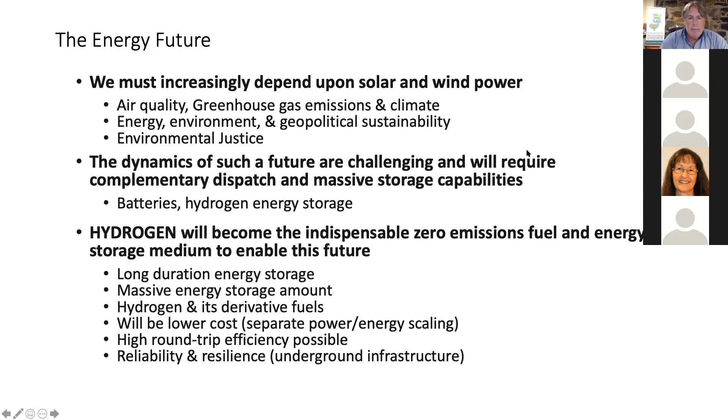Ambitious, targeted, and near-term action is needed to further identify and overcome barriers and to reduce costs. Technologies already available today enable hydrogen to produce, store, move, and use energy in a wide variety of ways. Hydrogen is already widely used in some industries, but has not yet come close to its potential to support the necessary clean energy transition.

Hydrogen can help tackle various critical energy challenges, and it offers ways to decarbonize a range of sectors, including chemical, iron, and steel production, each of which have been proven difficult to otherwise reduce emissions in a meaningful way. For hydrogen to make a significant contribution, it must be sustainably produced at a lower cost, and it also must be adopted in sectors where it is almost completely absent at the moment.

Hydrogen use today is dominated by industry, namely oil refining and the production of steel, ammonia, and other chemicals. Virtually all of this hydrogen is supplied using fossil fuels, so there is significant potential for emission reductions from clean hydrogen. In buildings, hydrogen could be blended into existing natural gas distribution networks with the potential for direct use of hydrogen in boilers or fuel cells.

In power generation, hydrogen has the potential to help with variable output from renewables, whose availability is not always well matched with demand. In fact, hydrogen is becoming one of the leading options for storing energy from renewables and looks promising to be the lowest cost option for storing electricity over long periods of time.

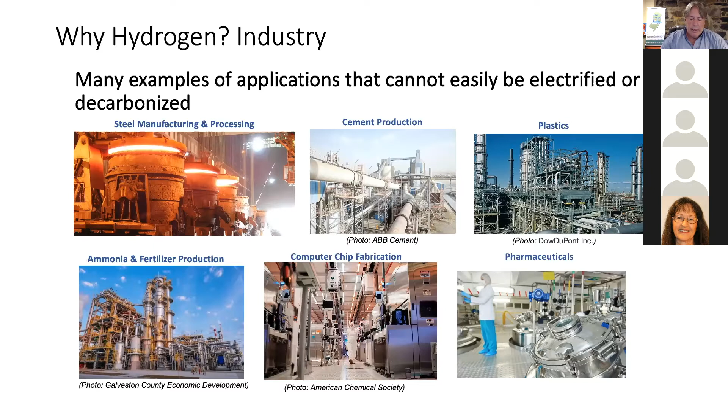Hydrogen and hydrogen-based fuels can transport energy from renewables over long distances, and these fuels can also be used in gas turbines to increase power system flexibility.

In transportation, hydrogen is thought to be a more efficient means of providing fuel for heavy-duty transportation. While I believe that battery electric technology is perfect for the light-duty passenger sector, hydrogen long-haul trucks are quicker to refuel and can easily be refueled at depots. Electric batteries are heavy and take up valuable space that could be used for cargo.

It's noteworthy to mention that several warehouses right here in New Jersey are currently using zero-emission hydrogen forklifts and other cargo handling equipment. I'll also note that shipping and aviation, which obviously are important to New Jersey's economy and environment, have limited low-carbon fuel options available and represent a tremendous opportunity for hydrogen and hydrogen-derived fuels.

The time is right to pull together the stakeholders to tap into hydrogen's potential to play a role in a clean, secure, and affordable energy future.

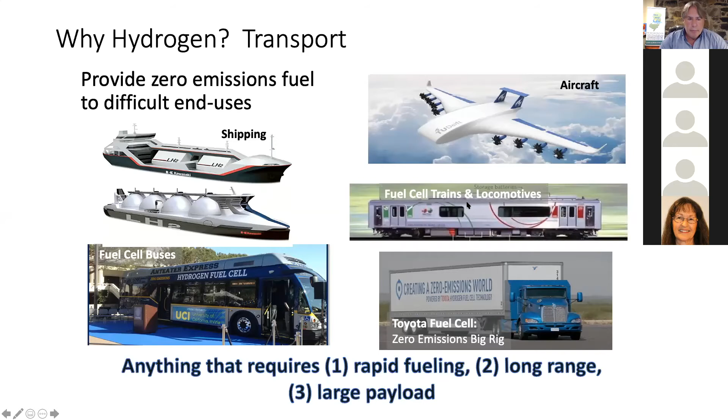There have been false starts for hydrogen in the past. This time, I think it will be different. The recent success of PV, wind, and light-duty battery electric vehicles have shown that policy and technology innovation can be agents of change. These changes seemed far-fetched when I and others started to talk about light-duty battery electric vehicles 12 years or so ago. However, with the increased recognition of the urgency of climate change mitigation, strong interest in green hydrogen as being the next necessary step on the path to net zero is coming from a diverse group of governments and companies, many of whom are represented with us today.

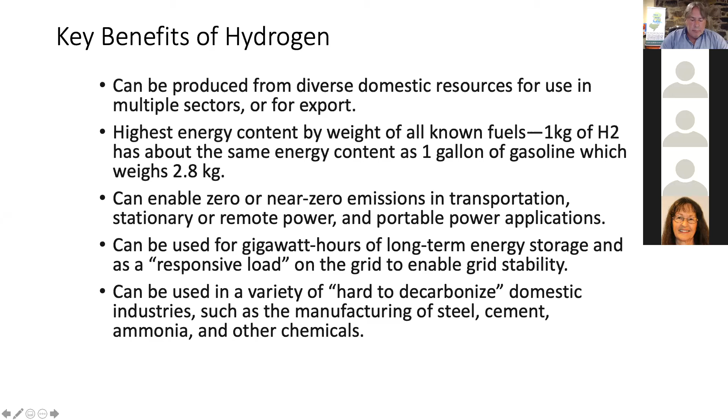Stakeholders include renewable electricity suppliers, industrial gas producers, electric and gas utilities, auto and truck makers, oil and gas companies, engineering firms, and cities and states across the world.

Green hydrogen has been in the news often lately. As you'll hear on our first panel, the Department of Energy is putting hundreds of millions of dollars into research and development of hydrogen-based technologies. And recently announcing a new DOE program to accelerate innovation and spur demand, Secretary Granholm said, clean hydrogen is a game changer. It will help decarbonize high-polluting, heavy-duty, and industrial sectors while delivering good-paying, clean jobs and realizing a net zero economy by 2050.

There is more hydrogen in the universe than any other element, but hydrogen atoms do not exist in nature by themselves. To produce hydrogen, its atoms need to be decoupled from other elements. How this decoupling is done determines hydrogen energy sustainability.

I've already spoken a lot about green hydrogen, but isn't hydrogen a colorless gas? Well, yes, it is a colorless, invisible gas. But as most of you probably know, not all hydrogen is created equal. Keep in mind that hydrogen in itself is a clean fuel. Manufacturing hydrogen fuel, however, is energy intensive.

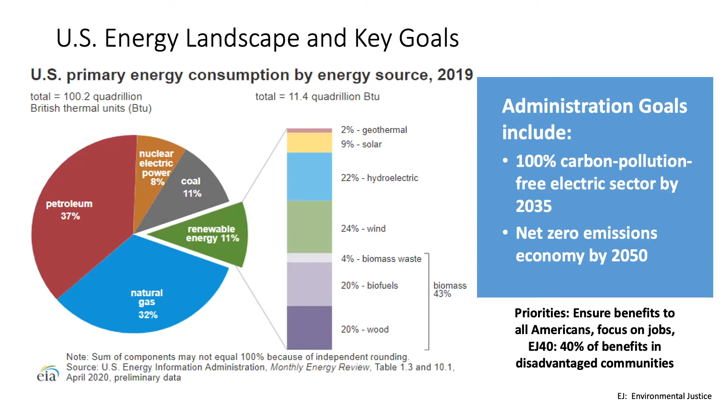But also we're quite interested in metals production, in particular steel. If hydrogen's used for steel making, it dramatically reduces the carbon emissions associated with steel making. So that could be an opportunity as well.

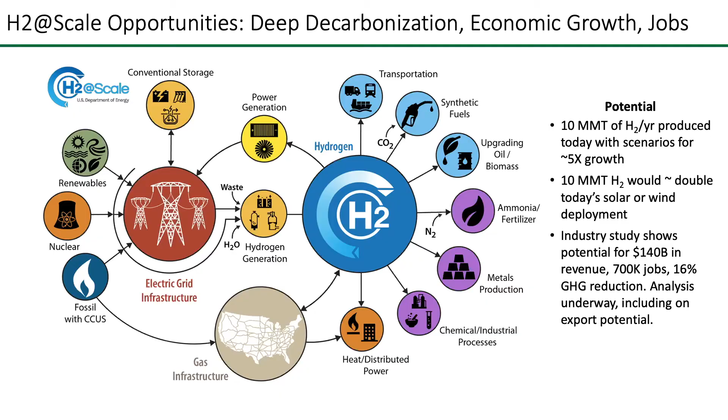So it's not just about the Hydrogen Fuel Cell Technologies Office in DOE anymore. And it's a good thing because there's considerable money going forward in the budget request. The president's budget request for fiscal year 22 for hydrogen is $400.5 million across all these different offices - EERE, where we are, Hydrogen Fuel Cell Technologies Office, FE Fossil Energy, NE Nuclear Energy, and Office of Electricity, and ARPA-E, which is a special R&D group, are all contributing money or requesting money to contribute to pushing for green hydrogen. I also want to mention the interagency working group.

We're doing a number of collaborations, some of them in demonstration deployment. One in particular is building a heavy duty truck. We call it the H2 the Rescue truck. And this truck is designed to provide relief for disaster areas, from fires, from hurricanes, tornadoes, natural disasters that occur. We're working with Army and DHS FEMA to develop this truck. Fuel cells provide the unique capabilities of exporting power. We'll have 25 kilowatts of exportable power and some water as well.

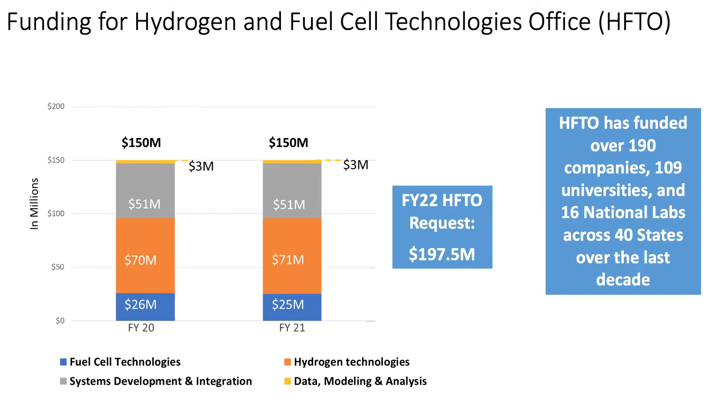A little bit about what we've done. I won't read it, but the national labs, 35% of the patents are coming from the national labs. That's a notable accomplishment for them. Over 1,000 patents, 30 technologies in the private sector being used currently, many more to come in the future. I'll point out a couple of them.

First, our catalyst work is something that is of global interest. There's fuel cell developers in Europe and Asia that are working with us on developing the very best catalyst for PEM fuel cells. And electrolysis, we're moving into the megawatt scale now, not just small electrolyzers for retail stations for refueling, big ones, megawatts of electrolysis for some of these very large application areas.

Forklifts, we've been working on that for a long time, and now we're watching the commercialization of that take off to an incredible level. Over 40,000 of them are in industry, and it's really a great success story in terms of commercialization. So it's been done before - we can do it in these other sectors and applications too.

I want to point out a hydrogen refueler. This refueling system is about the size of a very small car, and it's relatively easy to install. And it's called the Simple Fuel. Simple Fuel competed and won the H Prize, a prize that we give out for companies willing to risk $1 million worth of development, and they won that prize, and now they're deploying these systems that use electrolysis in other countries as well as in the US, Japan. We just installed one at the National Park Service here in DC to do demonstrations, and that's another example of industry working with us to get a simplified version of a hydrogen refueling and dispensing system.

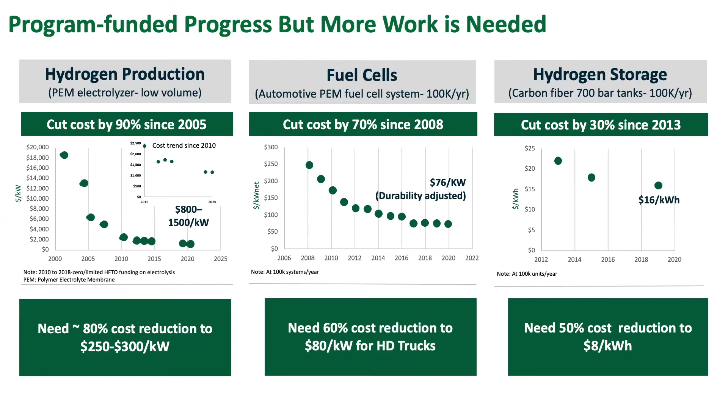Storage for gaseous and liquid storage continues to need to go down to about half of what it is today. So that's another big challenge we have. Next slide, please.

So what do we got so far? There's over 8,000 backup power systems around the country, primarily for backup power for cell towers. Already mentioned forklifts, huge success in industry, very happy about that. PEM electrolyzers, we need to ramp that up quite a lot.

Buses are being bought and put into commercialization by individual transit authorities. For years, it was a DOT, Federal Transit Authority effort, and now it's up to the local transit authorities, which they are doing to continue that commercialization.

California continues to be a great partner, still building stations for light duty, working with us on some heavy duty things as well. And the Northeast is starting to get their stations put in place. I think you'll hear about that later today. And many other states have plans for rolling out big hydrogen programs.

So we've got 1,600 miles of pipeline in the U.S., and most of them are in the Gulf Coast area of Texas and Louisiana. We need to learn from that and figure out a way to develop pipelines that connect major cities and ultimately the whole country. There's some key areas. I'll touch on it in a minute.

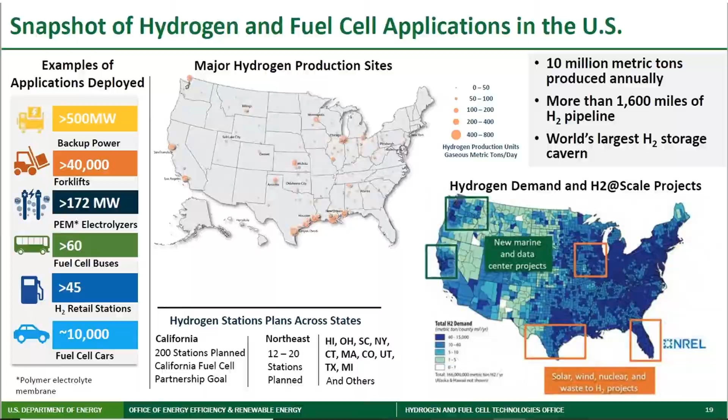So forklifts, we started, and JoAnn, you'll remember this, with 4 sites at distribution centers for the Department of Defense back around 2002, 3, and 4, with about 90 forklifts using different ways to make the hydrogen on site or trucked in. Then we went to the Recovery Act and deployed with industry 50-50 cost shares, about 900 of them. And now there's 40,000 of them in commercial use with over 20 million refuelings performed. There's one done every 7 minutes, I'm told, a refueling of a forklift.

And this proves that fuel cells work and we can refuel in a very safe way continuously to support these kinds of industries and applications.

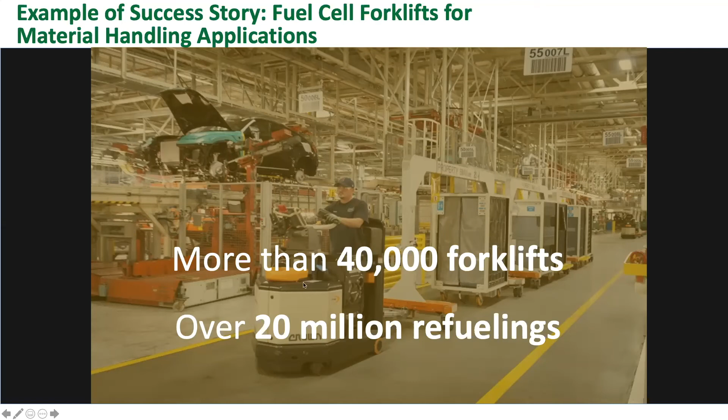Next slide, please. Excuse me, Pete. Yep. Hi, so yeah, we need to leave some time for Genevieve, and I was hoping we do have one question that I think requires answering. Okay, so let me finish up quick.

We've already talked about backup power. We're working with the U.S. Maritime Administration. We did a pier-side power system there, and now we're doing a shore power system also with the National Oceanic and Atmospheric Administration. Next slide.

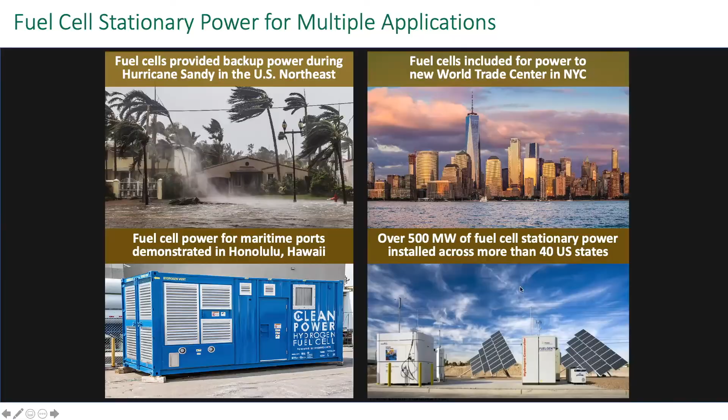So I'll point out some things I haven't pointed out before. The UPS truck, in collaboration with California Air Resources Board, is deploying 15 of them in an environmental justice area in Southern California. The ferry boat is being developed by California Air Resources Board and industry, and our floating refueling system will provide fuel for that.

San Bernardino County Transit Authority is building a first of its kind in the U.S. commuter rail system using fuel cells and a self-propelled car. So quite a lot happening in transportation. I didn't mention heavy duty, but Port of Los Angeles and Toyota, many of you already know, has already started demonstrating drayage trucks. Next slide, please.

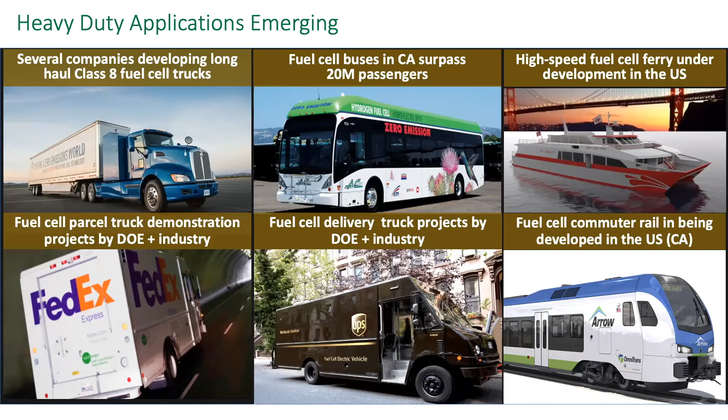So I'll just hit the things that we haven't yet. Those orange boxes we showed you a minute ago, one of them is in Texas, using a variety of different ways to make the hydrogen. We're also working with the Nuclear Office and co-funding a demonstration project using megawatt scale electrolyzers for making hydrogen through nuclear. The data center I've already mentioned.

I do want to mention workforce development. We just started a new project called H2 Edge with EPRI, the Electric Power Research Institute, developing curricula for training at various levels: vocational, undergraduate, and graduate. Next slide.

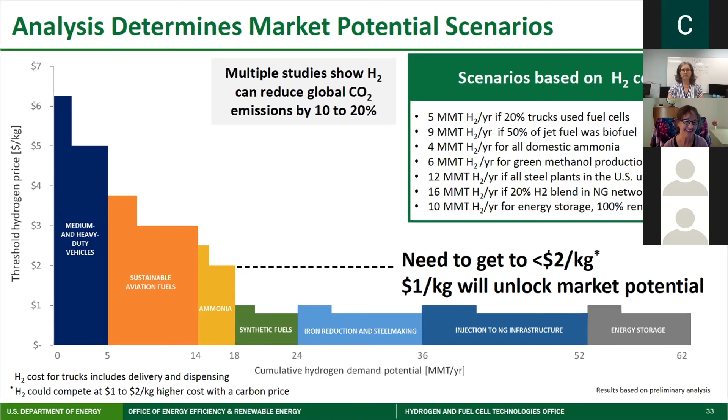So the cost of hydrogen is a really big challenge, as Pete mentioned. There are a few areas the offices are working on across a range of different technologies. I'm going to talk a little about electrolytic hydrogen production, specifically low temperature electrolysis, which could have applications in a lot of distributed hydrogen production applications.

There are four main ways the cost can be reduced. One is just access to inexpensive renewable electricity, especially sources that may be constrained or have excess, where prices are lowered by having provisions for the valuation of grid services. So areas where we can lower the electricity cost.

That's sort of outside the realm of hydrogen research and deployment specifically, because it's based more in other industries as well as policy and regulation. The areas we can maybe affect more are R&D improvements to both the stack and the balance of plant, in terms of efficiency and cost. Those are things that both industry and research institutions can take on.

Then there are two more that are driven by deployment. One is cost reductions from high volume manufacturing, where you get economies of scale, and the only way you get that is by increasing deployment. The fourth area is reduction of operating and maintenance costs, through component reliability—making sure maintenance costs are reduced—as well as workforce development and a network of crews that can manage this.

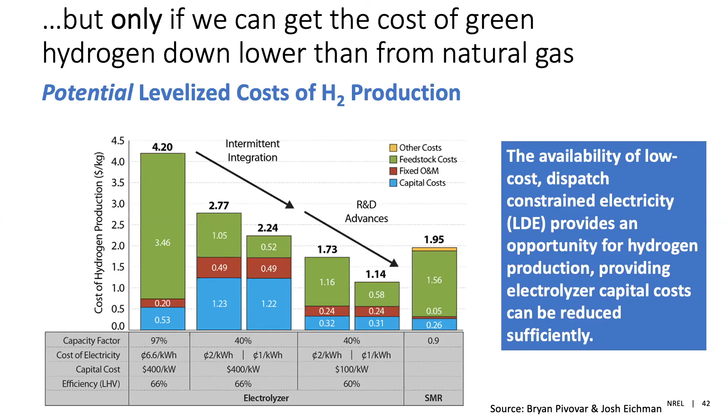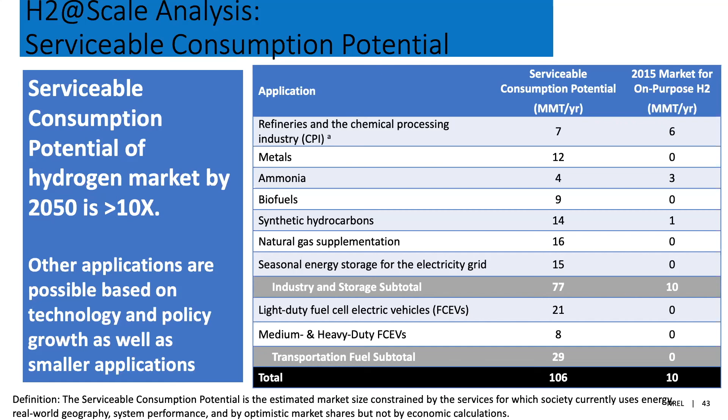NREL engages with different stakeholders through a consortium approach that spans the national labs. There are five areas we think about: make—we're making hydrogen, and we engage through the newly launched H2New for new water electrolysis, as well as HydroGEN 2.0, which looks at more emerging technologies. Move is supported by HyBlend, looking at natural gas blending and pipeline infrastructure, as well as HyMARC, which looks at storage and transportation of hydrogen through different kinds of carriers and materials.

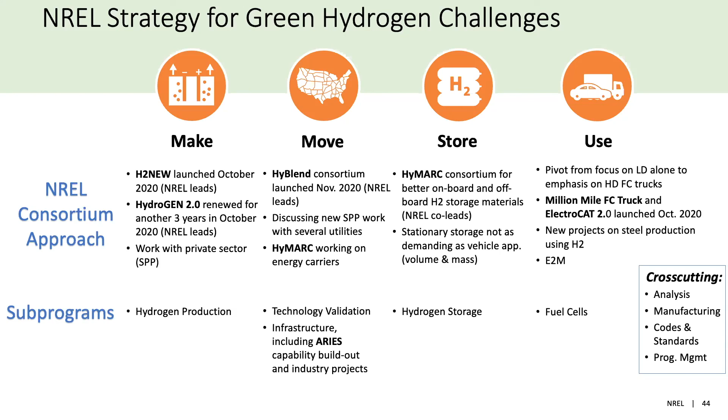The use is supported in ways by what Pete mentioned, the Million Mile Fuel Cell Truck, looking at the trucking industry, as well as ElectroCAT, which does a lot of fuel cell work. There will also be a new consortium to engage stakeholders. All of these programs are supplemented by cross-cutting analysis that helps bring everything together.

Looking at some of NREL's capabilities, NREL has a new capability called the Advanced Research on Integrated Energy Systems, at the redeveloped Flatirons campus, which had previously been the National Wind Technology site. This is going to look at multi-megawatt integration, tightly integrated systems. It includes wind and solar resources that can be used, as well as right now a 7 megawatt controllable grid interface, which is going to be upgraded to 20 megawatts.

This is for really integrating the testing of both real and simulated elements into an integrated system. This is going to be a really fantastic resource available.

In development and under construction right now, starting now, there's going to be megawatt scale hydrogen system integration—1.25 megawatts of PEM electrolysis, compression up to 3,000 PSI, possibly more in the future, as well as 600 kilograms of storage and a 1 megawatt fuel cell. All of these systems can be used for integrated testing of components and systems before they go out into the world.

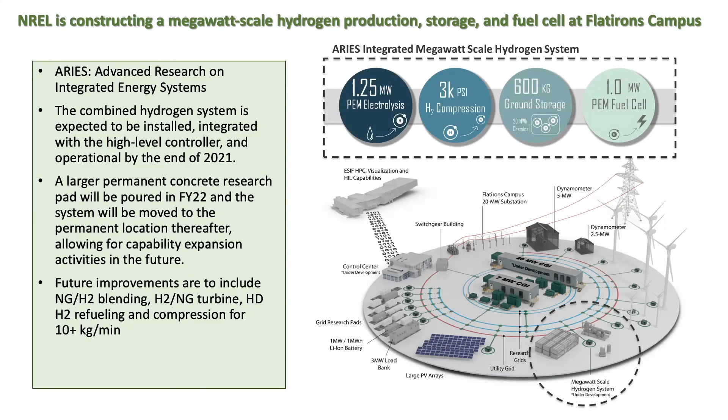So this is where we can validate and test these integrated systems. There's already further improvements in the works, looking at natural gas hydrogen blending aspects. We'll be looking at flex fuel turbines, as well as the refueling infrastructure for trucking, and a big part of that is the throughput, a much higher throughput at 10 kilograms per minute.

One of the areas we supplement a lot of the analysis is through the National Fuel Cell Technology Evaluation Center. This provides independent analysis of real world data sets while protecting the data sources, complementing experimental work and informing stakeholders in deployment projects.

This is an example of what we call composite data products, around maintenance events at refueling stations. Right now the two active projects are around retail hydrogen refueling stations and fuel cell electric buses. In the past we've also had data out for fuel cell electric vehicles, forklifts, stationary and backup fuel cell power, as well as lab data sets. This is a complement to some of the other types of work we do.

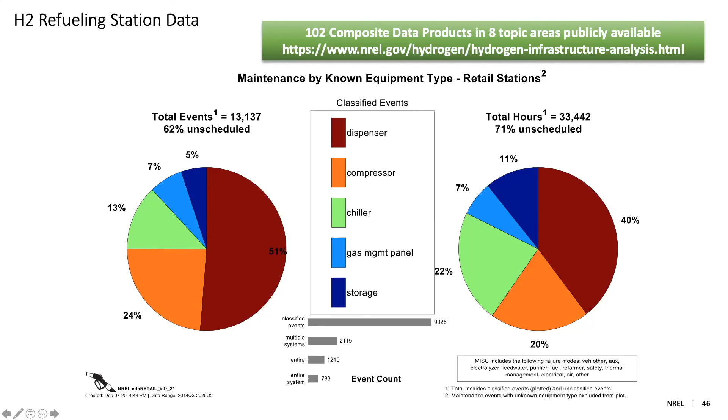This is an example of some collaboration projects we work on. This is a CRADA project called Innovating Hydrogen Stations, aimed at looking at what it's going to take to quickly refuel heavy and medium duty trucks and buses. The objective is to get experimental data for the 10 kilograms per minute average refueling rate, which is a pretty big step for the industry. As an example, right now refueling stations servicing mainly light duty vehicles in California achieve about 1 kilogram per minute, so this is a big step for the industry and an important development for deploying these technologies.

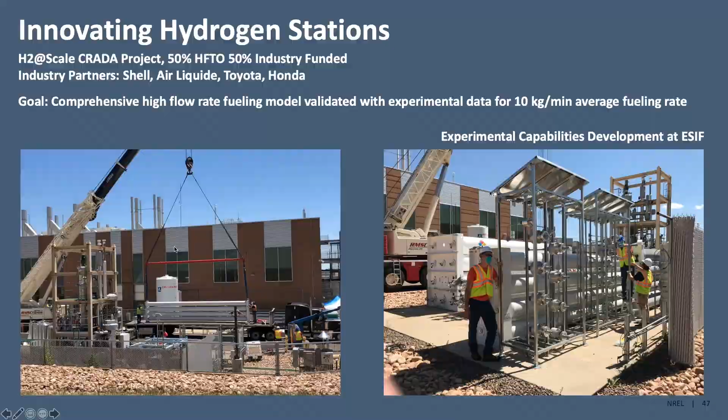We also look at electrolyzer integration with battery electric. This is an example of looking at highly integrated scenarios and how electrolyzers can help stabilize your grid while also providing other services to the electric infrastructure.

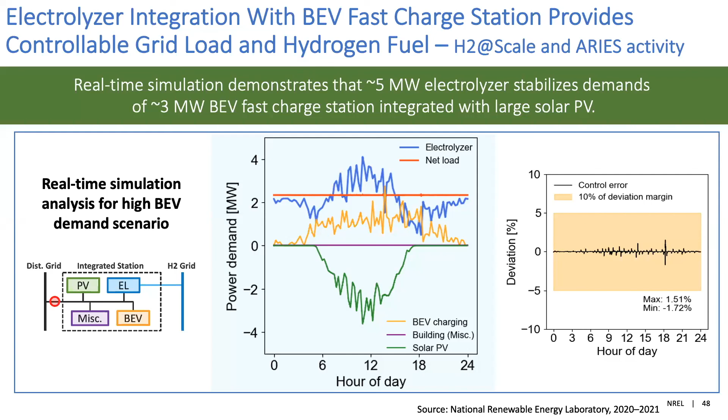Next, I'll just go through these pretty quickly. This was a question in the chat. So we do have experimental work on biomethanation with electrolytic hydrogen, looking at renewable natural gas, basically production of that.

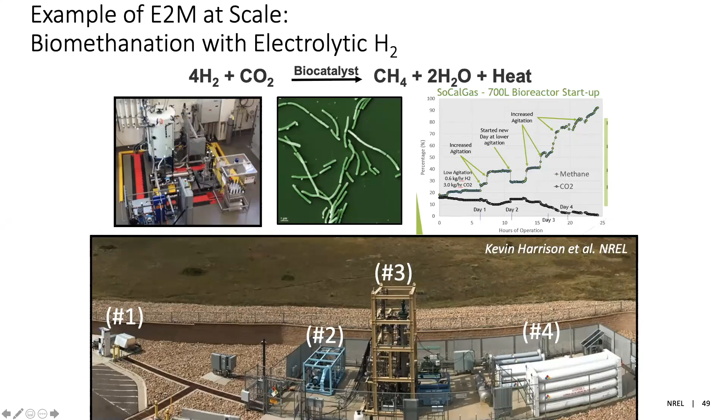Next slide. We have cross-cutting analysis that NREL and Argonne National Lab are doing on exports. We're looking at how and where the production capacities are for producing, as well as the infrastructure needed to export into a kind of global hydrogen commodity trade.